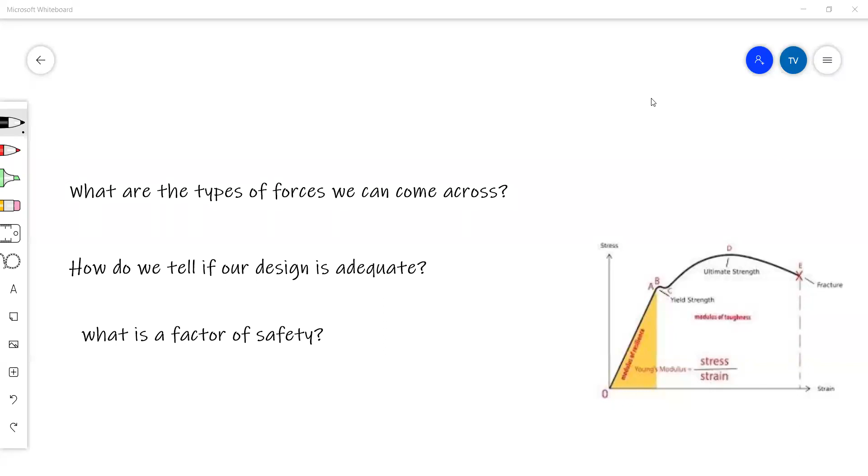So while you guys think about that, I have a few questions for you. They're based on the assignment and also a bit of engineering theory, since this is the assignment that introduces you to what is to come, especially if you're a mechanical or civil engineer.

Okay Va, your problem is, sir, I've done my calculations, but the radius of the bolt was too small. If I increase the radius, the number of bolts will be less than 4.

Right, my radius of bolt is 1.5. So what's wrong with having less than 4 bolts? There's no limit as to how many bolts you can have. The minimum that you can have is 2 — you need at least 2. So even if you reduce the number of bolts that you have, that's fine, so long as...

So even when you do a calculation with 2 bolts, what is your bolt radius? Have you done that yet or not yet?

The other issue you might be having is maybe you've made the radius of your hub, or maybe you've made your PCD too big. Maybe your PCD is way too big, and that's why you have very little force, so small bolts only. That would be the only explanation — that your hub diameter or your PCD is far too big.

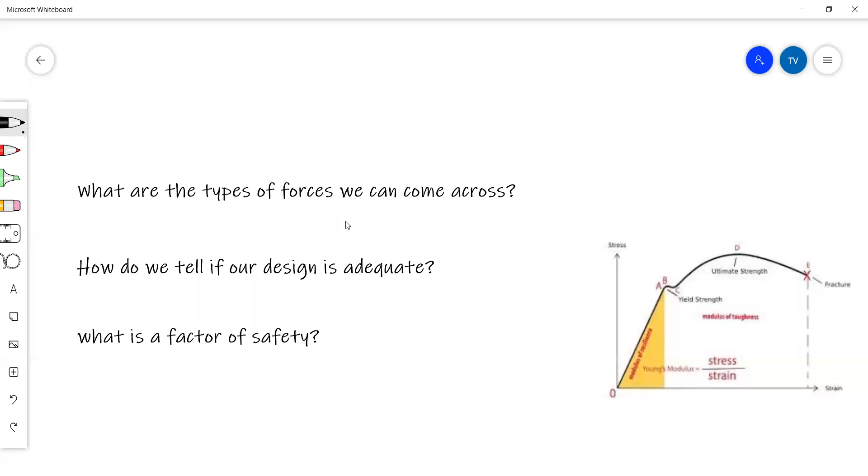Okay, so before we jump into that, what are the types of forces that we might experience? What are the types of forces that we engineers have to account for? In this assignment there are 3 types of forces, but there are many more. This is just to see whether or not you guys understand the basic theory before jumping into the calculations. So what are the 3 types of forces we can generally come across?

Yes, one is tensile. Shear force is another, yes. And compressive, very good.

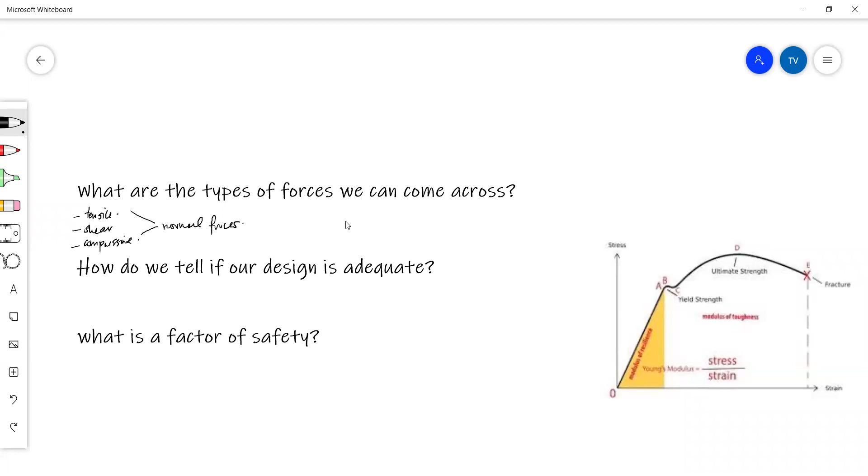So tensile and compressive are normal forces, and shear is the odd one out. By normal forces, I mean if we're looking at a component, let's say a round rod, and we apply our force, the force is acting normal, or 90 degrees perpendicular, whatever you'd like to call it, to the surface that we're interested in finding the stress on.

So it's a normal force creating a normal stress. Shear stress acts parallel to the surface, and it causes a sort of slicing motion, or makes the different layers of the component want to try and slide against each other. That's called a shear force.

So yes, we have 3 types of forces. Tensile is trying to pull the element apart and try to make it stretch. Compressive is trying to squash it together, and shear is trying to make it slice.

Second question: how do we tell if our design is adequate? When do we know that our design will work? How do we know when we have sized our component correctly?

So as engineers, especially design engineers, there are 2 things that we have to keep in mind. First one is safety, and safety is always paramount — safety is the number 1 priority. Second one is cost: we have to make sure our designs are cost effective as well as being safe.

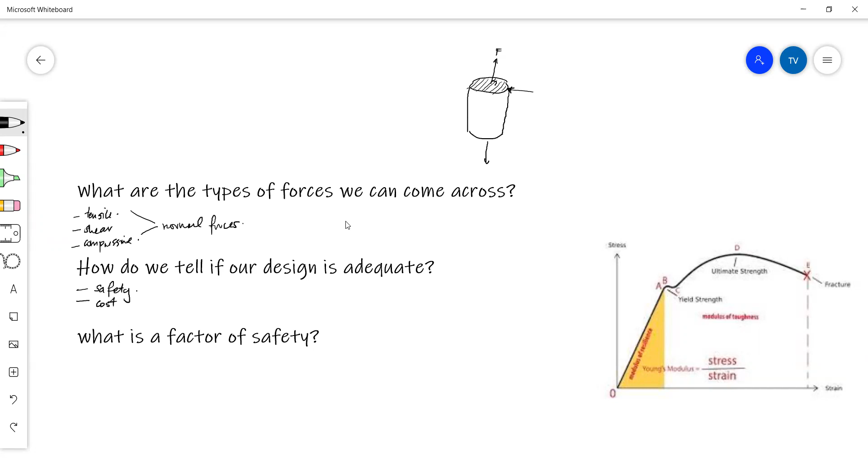That's why when we say in your project, it's very good to include a cost aspect to your design criteria, because cost is always something that people are very interested in. Cost and safety.

So hopefully you're all familiar with this stress strain curve. This is the stress strain curve for ductile materials, so mild steel, aluminum, they all have stress strain curves similar to this. And each material has its own stress strain curve.

Now the stress strain curve shows the relationship between the stress and the strain. Basically, let's look at our component again. I'm experiencing some force. So as we increase the force, the stress will increase. And as the stress increases, the strain increases. That is only true in this first region here.

This region is called the elastic region. And in the elastic region is where we usually try and work, because we know that there is a definite relationship between the stress and the strain that our part will experience. Now, stress is the amount of force per area, and the strain is the change in length, or it's a change in shape with the increase of stress.

Mechanical and civil engineers, this is sort of grassroots stuff for you guys, and you'll use this all the way through your next 4 years and then jumping into industry. This is the basis of everything that we do, pretty much. Stress and strain, the relationship between the two.

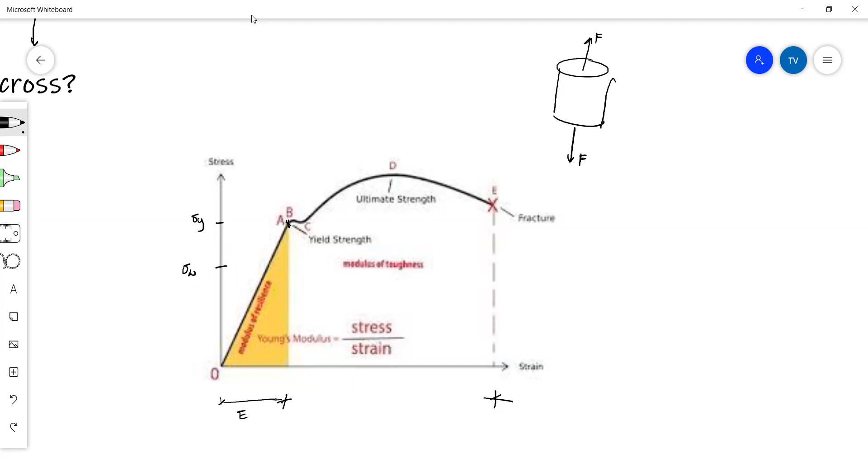Now, can anybody tell me what the factor of safety is? What is a factor of safety?

Now, the factor of safety is the direct relationship between the yield stress and the maximum working stress. It is the ratio between our maximum yield of the material and the maximum working stress of the component when it's performing its function.

Now, a factor of safety of 1 means the yield stress is equal to the working stress. And generally, this is advised against. Okay, we don't want this. What this means is we don't have any margin for error or any room for error. If we have some kind of anomaly, like there's some kind of impact force, or our shaft suddenly gets some surge in load and it starts to generate more power than it should, it'll mean our part will fail.

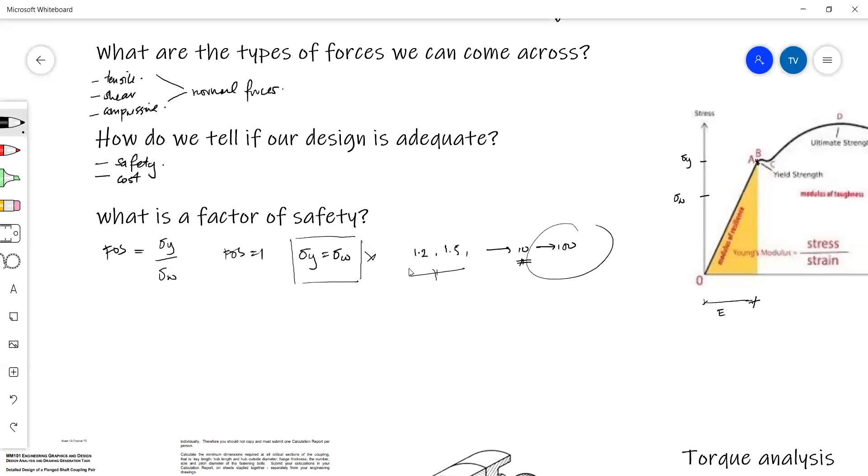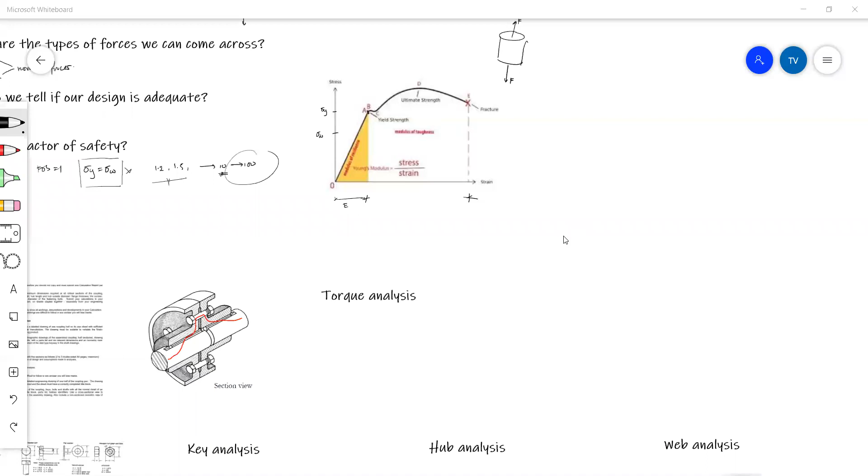Now jumping to your assignment. Your assignment is broken down into 5 different analysis types. We have our torque analysis, key analysis, hub analysis, web analysis, as well as our bolt analysis.

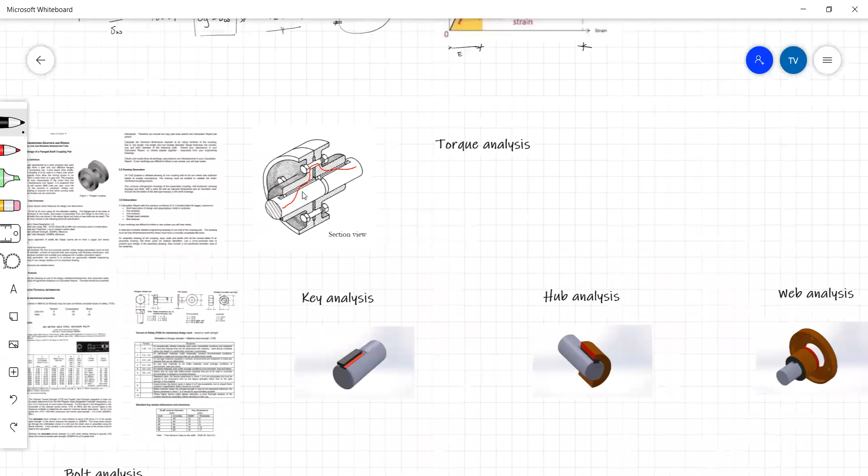The order that you do these in is dependent on the load path. The critical load path is we have our part A and part B. We're trying to rotate part B at the same power and with the same torque as part A. For that to happen, the forces have to travel from the shaft, which is rotating, to the key, to the hub, to the flange, to the bolt, and then out the other side.

So that's the reason why we do the analysis in that order: shaft, key, hub, flange, bolt. But for this assignment, we don't have to worry about the shaft because it's already given to us by the client. The client has already said that they want to use a 48mm shaft. So we start our analysis from the key analysis once we've determined our torque.

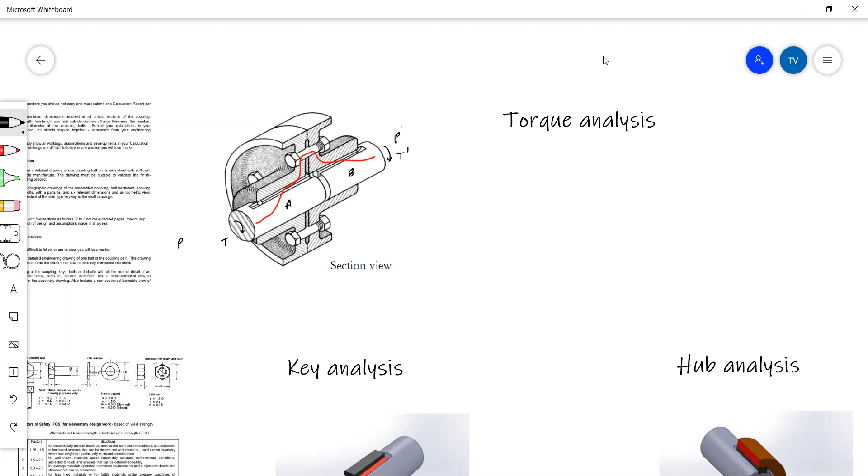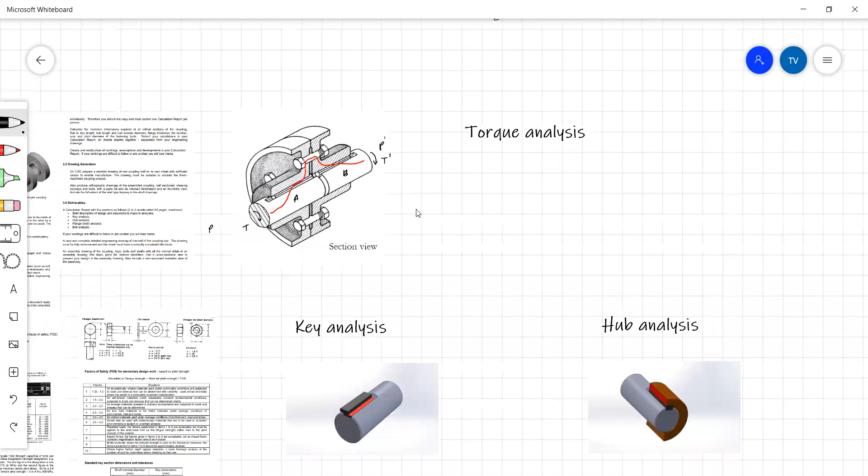The outcome of the key analysis is to find your key length. The outcome of your hub analysis is to find your hub thickness and then your hub diameter. The outcome of your web analysis or flange analysis is to find your flange thickness or web thickness. And your bolt analysis is to find the number of bolts and the size of bolts that you're going to use.

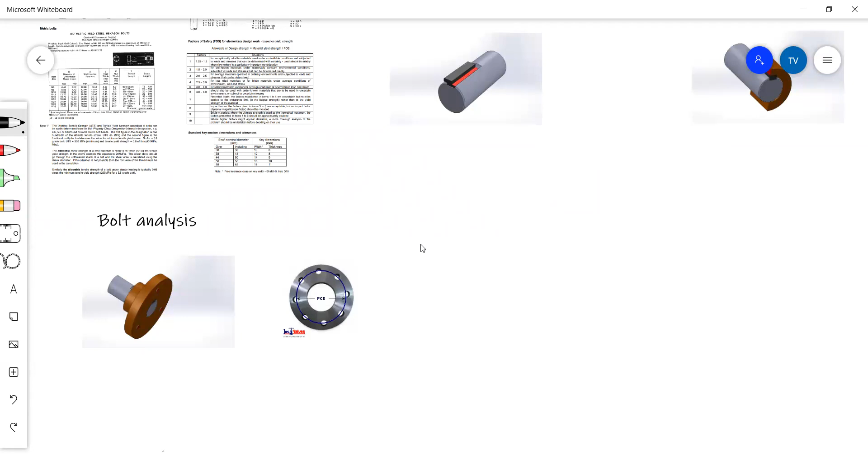All right, so I'll now talk a bit more in depth about the bolt analysis. And if you have any other questions about any other analysis types, I'll go over those as well. So the first step when you do your bolt analysis is to come up with your PCD. PCD is called your pitch circle diameter.

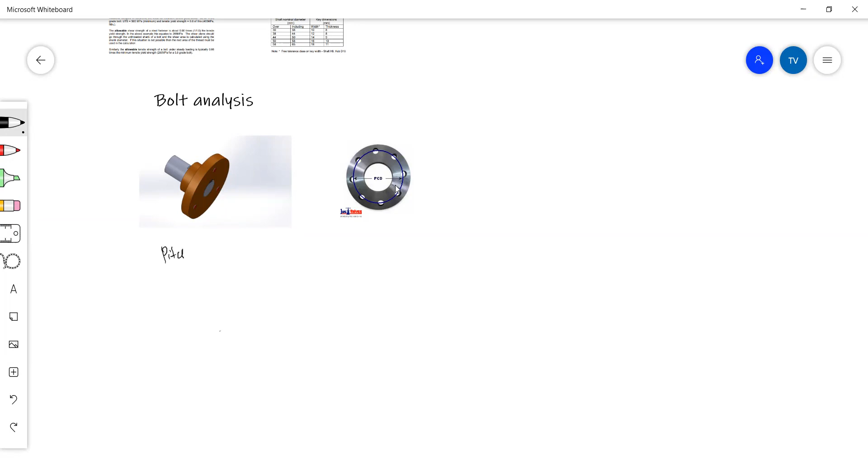Pitch circle diameter. What is the pitch circle diameter? It is the distance from the center of your bolts on one side to the center of your bolts on the other side. Okay, it is that distance. And your flange is round, so it'll be a circle, hence the term diameter.

Now your PCD is governed by two things, and the PCD will vary for each one of you. You will all choose a different PCD, or some of you might have the same, but this is completely up to you guys, and this is where you apply your engineering logic or designing logic to come up with this number. So let's say that this inside circle here is supposed to account for your hub. So this is your hub diameter, right? Your hub goes inside here. So your PCD obviously has to be greater than your hub diameter.

But then what's left over is the distance from the outside of your hub to the center of your bolts. That distance there, let's call it A. And that distance is the one that's up to you guys. So your distance A is dependent on accessibility.

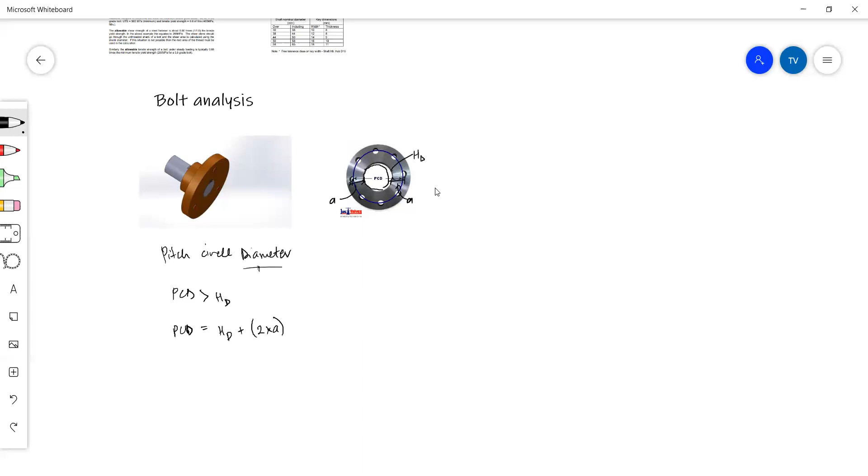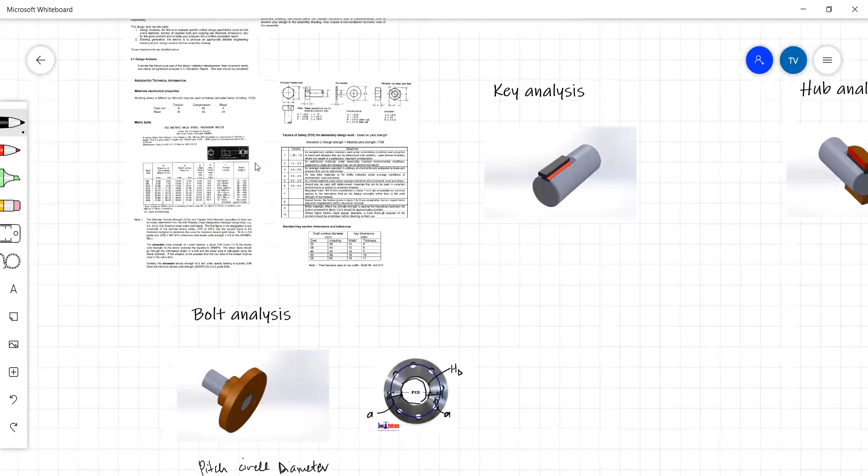Okay, you could also determine your PCD by looking at your bolt dimensions up here. This gives you the basic sizes depending on the size of bolt that you use. So if you know that your bolt head will protrude by this much from the edge of your bolt or the center of your bolt, you have to also account for that distance in your PCD.

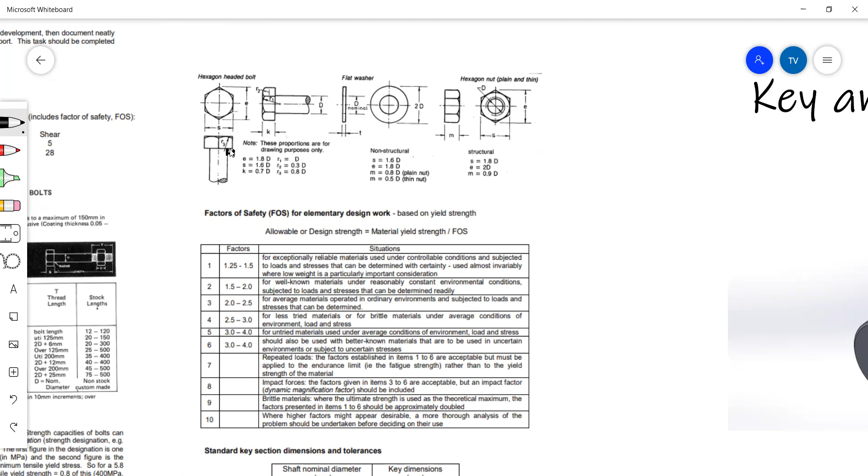So generally, if you work with an assumed distance A of anywhere between 30 and let's say 50, if you work with a PCD anywhere between those two dimensions, 30 and 50 millimeters, that's usually appropriate. But you could also do a bit of research into how much space you should leave when you're trying to design a flange coupling. That information is online as well. Different products have different PCDs. You could use some of those to help come up with your PCD. But generally around 30 to 50 millimeters is acceptable.

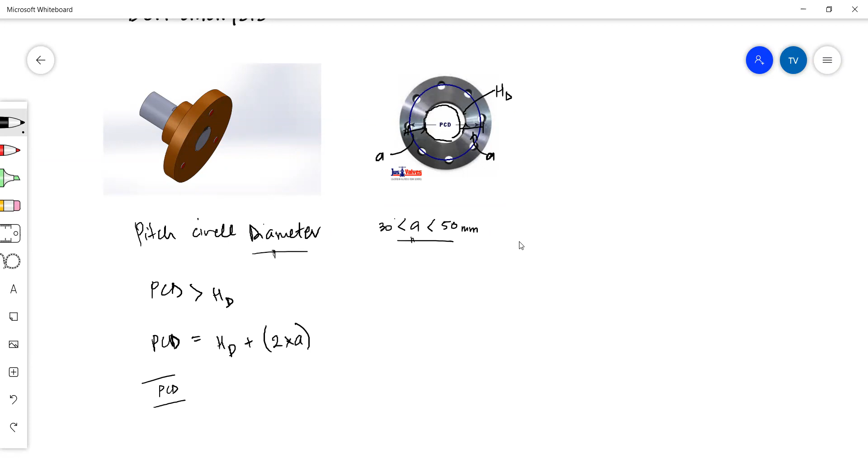Once you have that dimension, you plug it into this formula and you can solve your PCD. Does that answer your questions about PCD?

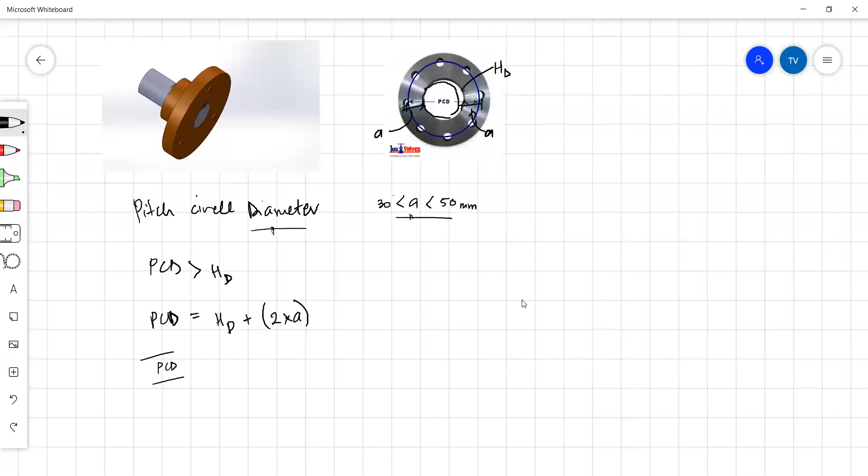Okay, great. So now, for each of these different analyses, we have to find the force.

At the center of the shaft, our force is maximum. As we get further away, our force will decrease, and that's because the relationship between force and distance is inversely proportional when torque is constant.

We already found our torque from our torque analysis, and we're trying to find the force. The distance will be the distance from the center of the shaft to the center of your bolts, which is basically your PCD divided by 2.

Making force the subject of the formula, we can find our force. Now, can anybody tell me what type of force we'll be experiencing on these bolts? What type of force will these bolts be experiencing?

Shear, compressive, tensile, which one? Shear force, yes, exactly. The rotation of this coupling is trying to twist these bolts, which creates sort of a slicing action, and we have a shear force.

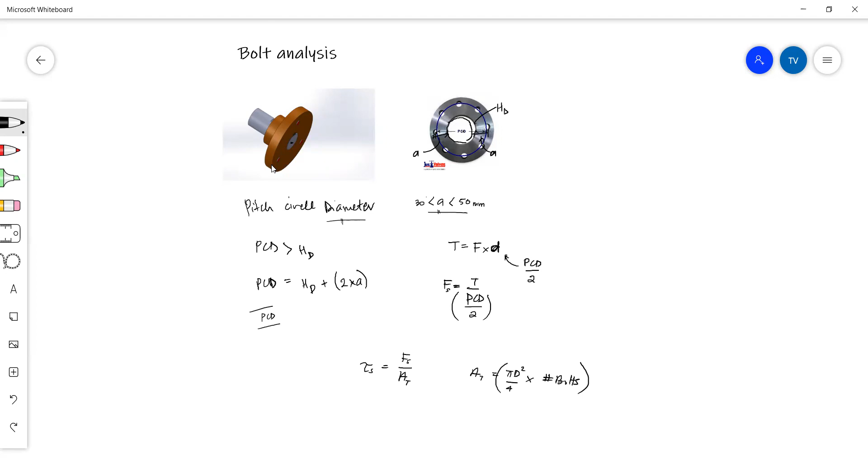We've already solved for our force. We just don't know our shear stress. Now the shear stress we can get from the question itself.

This bit of information here is about the bolt that we'll be using. It gives us the property class, the ultimate tensile strength and the tensile yield strength. But remember, we're looking at the shear force, so we'll be interested in the shear strength of the bolts. That isn't given here.

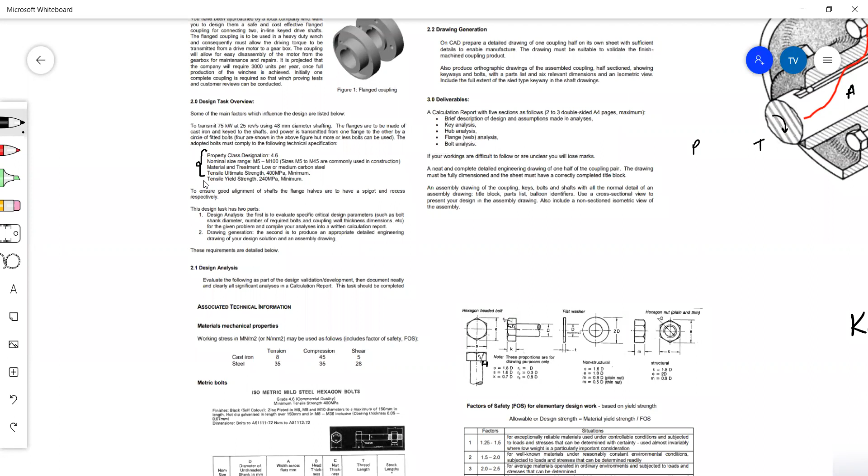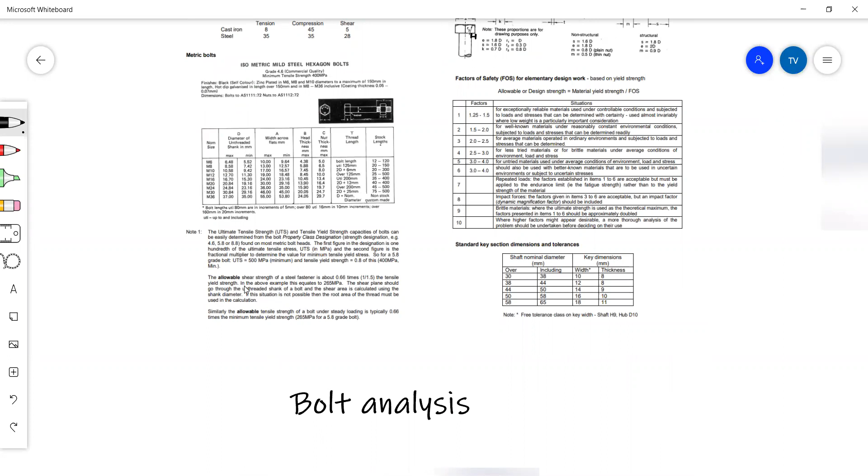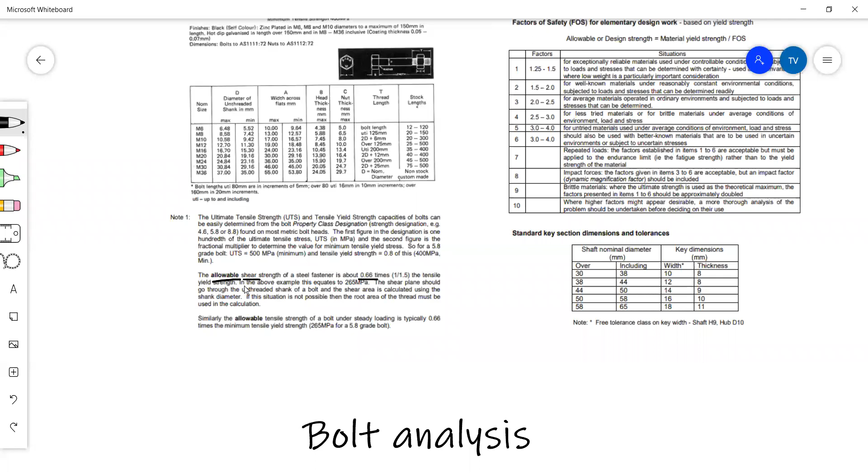However, if you read through and you have your information about metric bolts, this table, and then read this second paragraph, it says the allowable shear strength of the steel fastener is about 0.66 times that of the tensile yield strength, which means our shear strength in this formula is actually 0.66 times the tensile yield strength.

And we know that the tensile yield strength is 240 megapascals. So our shear strength comes to be about 158.4 megapascals. This is the value that we'll use in this equation.

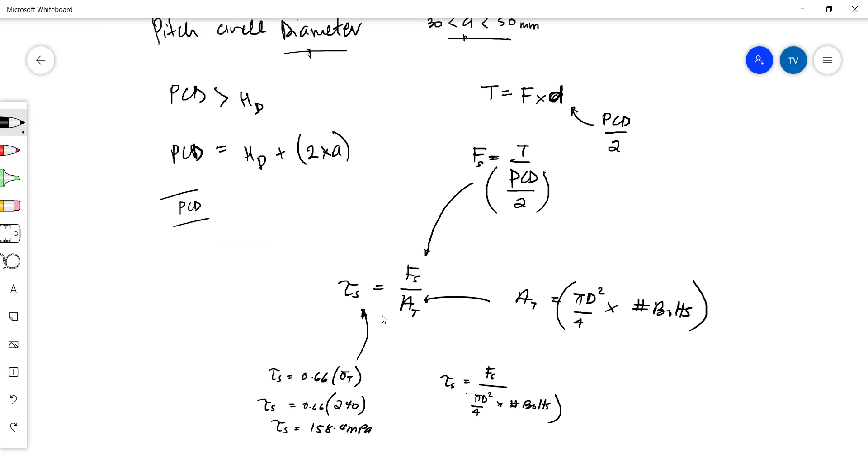We will use this force here, and we'll use this area here. So when we write it up again, it'll look something like this. Now we know shear stress, shear force. We don't know the diameter, and we don't know the number of bolts.

This is where you make the decision. There are two ways you can go about it: either you state the number of bolts and then solve for the diameter, or you state the diameter and solve for the number.

You could either say, I want to use 4 bolts, but I don't know the size. Or you could say, I want to use a size 12, so M12, meaning 12 diameter, but I don't know how many I want to use. So depending on how you want to go about this, you can rearrange your formula appropriately to solve for either.

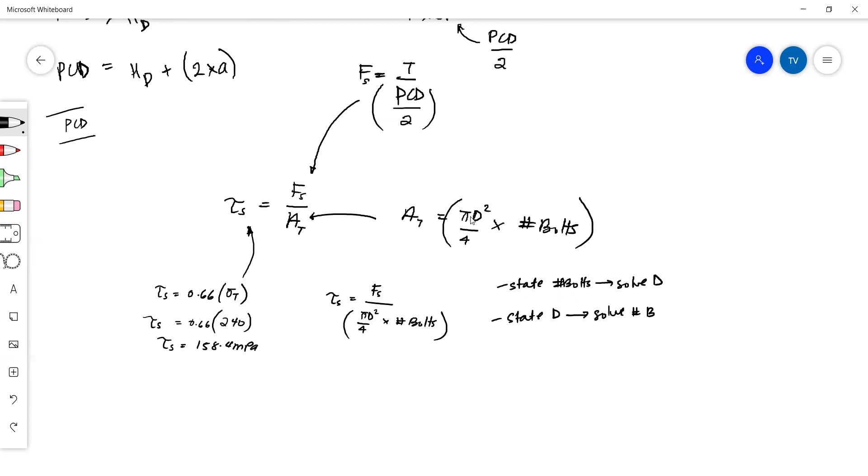Okay. So let's say I want to use 5 bolts, but I don't know the diameter. So I plug 5 in here, I make D the subject of the formula, and I come out with a diameter of 13 millimeters. Let's just say, for example.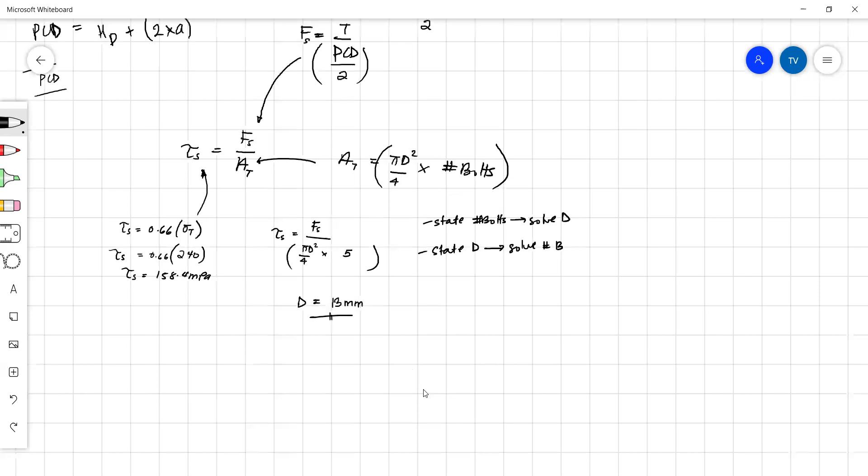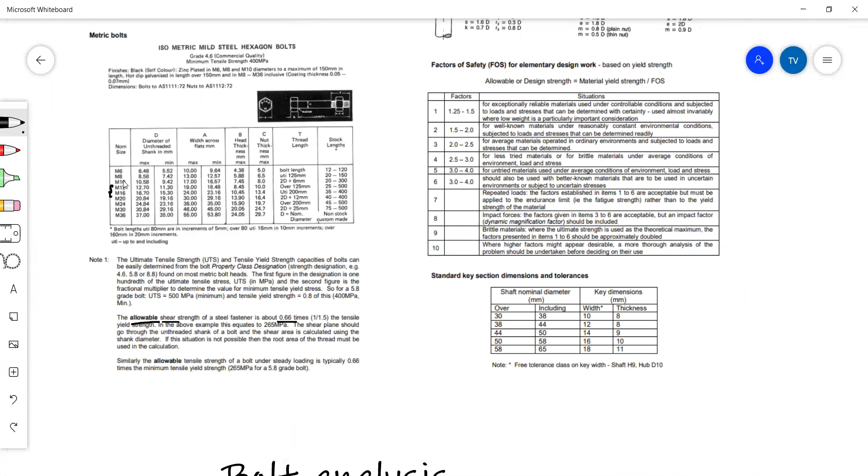Now, using this information, I'll go back to my table, and I'd look for M13, diameter 13. Now, M13 falls in between M12 and M16, so obviously I can't use M12 because if I use M12, my part will fail. So I have to use the next one up, so I would use M16.

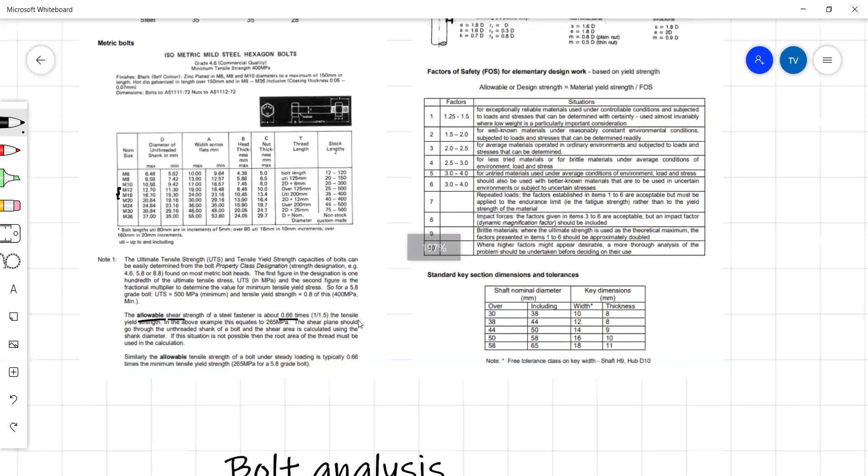So once you finish your bolt analysis, you would end with a statement like M16 by 5 at PCD of, and whatever PCD you stated up here, say 250 mil. And that's how you would end your bolt analysis.

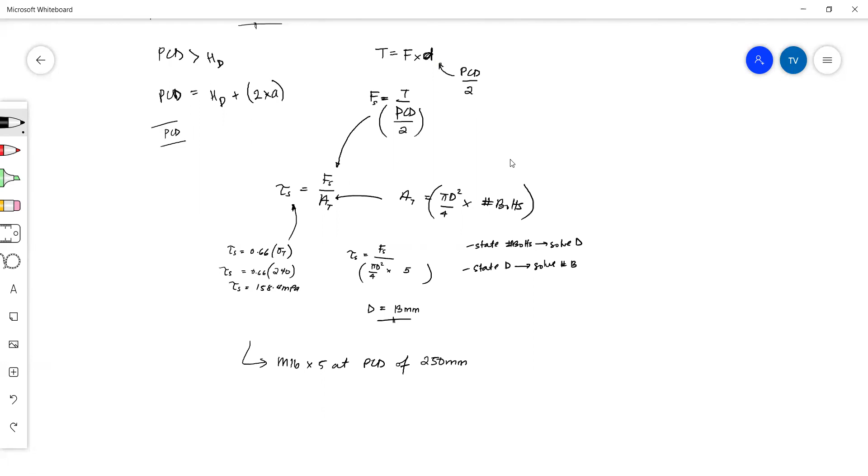Okay, any questions? Any questions?